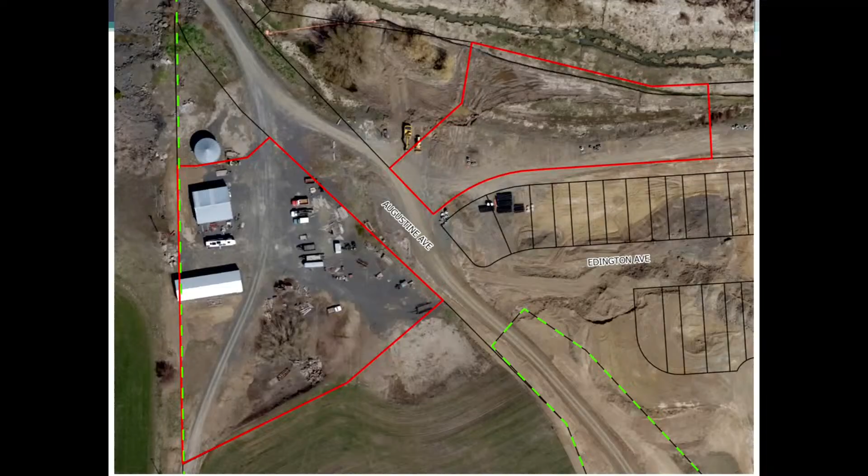So just a closer view of the current properties. There's a couple of outbuildings currently on the westerly parcel over here.

So the applicant, Impact Investors, is proposing the preliminary subdivision plat and the PUD of 4 parcels located at 2300 Augustine Avenue. The plat is 4.06 acres. The proposal is to create 10 parcels ranging from 5,500 square feet to 7,407 square feet in size, and 2 large common area tracts, referred to as the Augustine Avenue Apartments Addition. The PUD contains a mixed-use development with 10 buildings comprised of 114 dwelling units and 16 commercial live-work units, as well as an existing commercial shop that they're planning on retaining on the property.

Looking at the comp plan designation, it's urban residential - actually high-density residential, excuse me. Auto-urban residential is the yellow shade that surrounds the property, located within Edington First Addition as well. You've got parks and open space for the city park property here to the east.

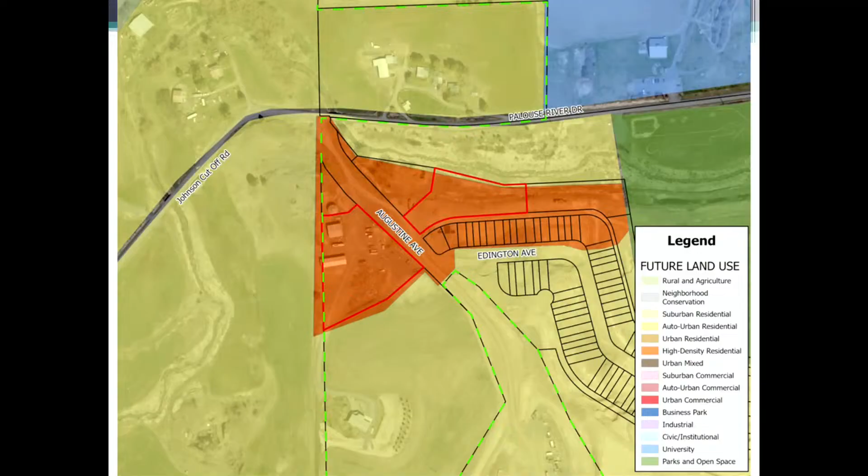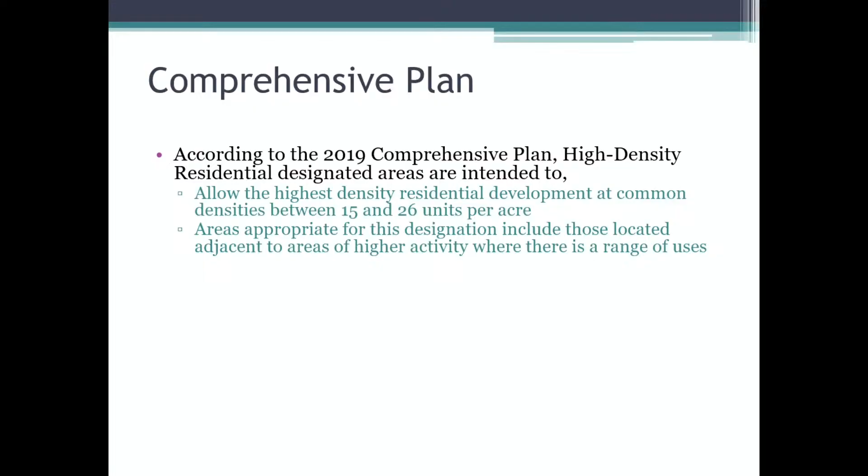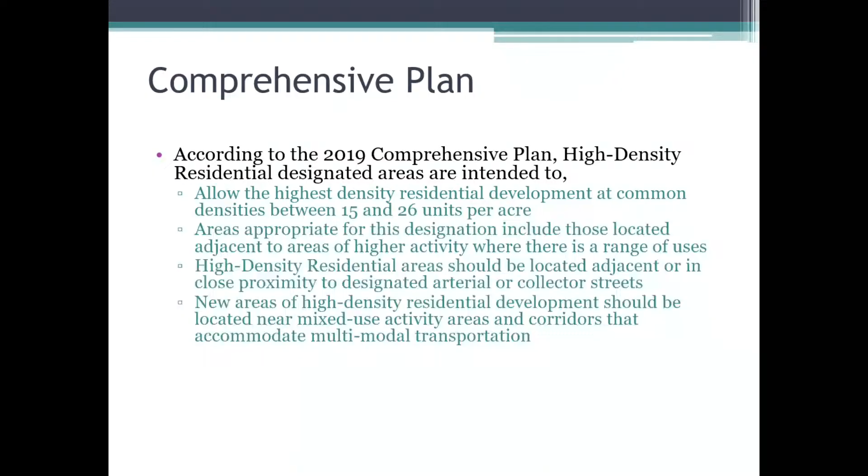High density residential in the comp plan allows the highest density residential development, at common densities between 15 and 26 units per acre. Appropriate areas for the designation include those located adjacent to areas of higher activity where there's a range of uses. It should be located adjacent or in close proximity to designated arterial or collector streets. New areas should be located near mixed-use activity areas and corridors that accommodate multimodal transportation. It points to the R3, R4, RO zoning districts as the appropriate designations.

This brings us to the zoning configuration of the area. Residential office is the subject property, as well as the properties in Edington First Addition here across Augustine, and then it transitions to the R3 designation within Edington First Addition, as well as property that was platted for Edington Estates but never proceeded to the final plat stage. So that's null and void for that subdivision plat over there, but the property is still R3.

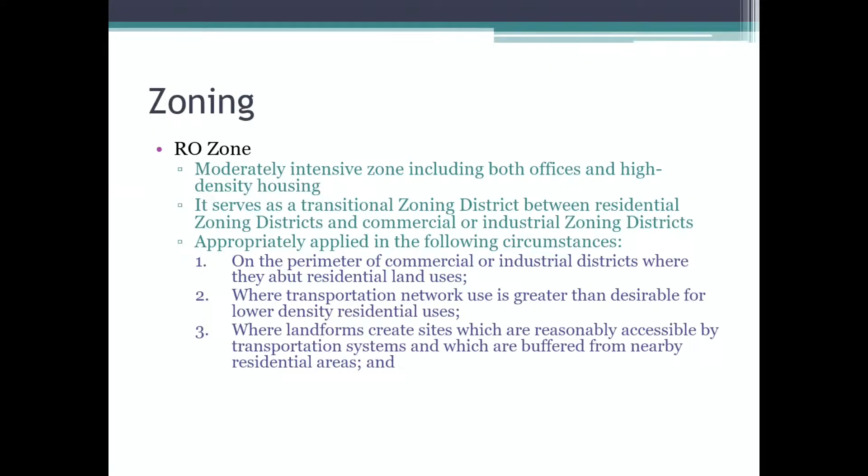So the RO zone, moderate intensity, includes both offices and high-density housing, and serves as a transitional zoning district between residential zoning districts and commercial or industrial zoning districts. It's appropriately applied on the perimeter of commercial or industrial districts where they abut residential land uses, where the transportation network use is greater than desirable for lower density residential uses, and where landforms create sites reasonably accessible by transportation systems and buffered from nearby residential areas, and where development patterns allow moderate intensity development without producing adverse visual impact or harm to the transportation network.

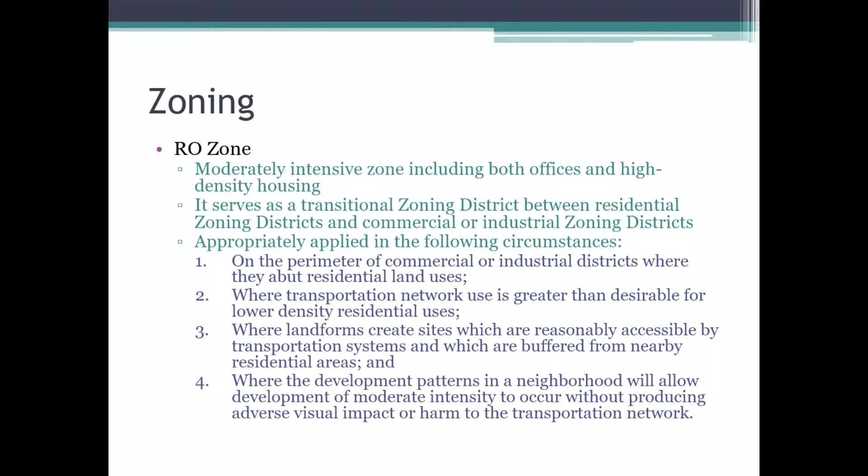So really a wide range of residential uses are permitted within the RO zone, anywhere between single family all the way to multifamily, twin homes, townhouses. Some commercial uses are also permitted, limited commercial services like veterinary services, professional offices, restaurants up to 1,500 square feet in size, group and small childcare facilities, community neighborhood centers, healthcare services, public parks, rec facilities, telecom services, personal care services,

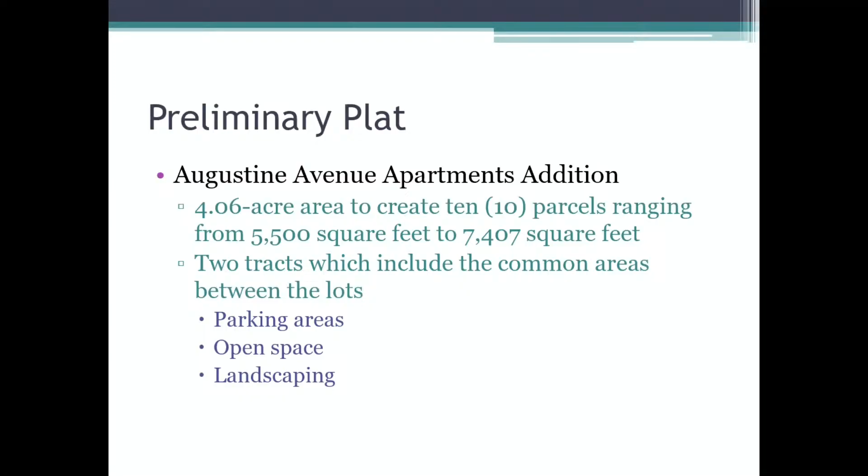and bed and breakfasts. This brings us to the preliminary plat of Augustine Avenue Apartments Addition. So we've gone over 10 parcels here, and then 2 tracts, which are the common areas. We'll get to this, but they include parking areas, open space, landscaping, as well as stormwater detention within those common tracts.

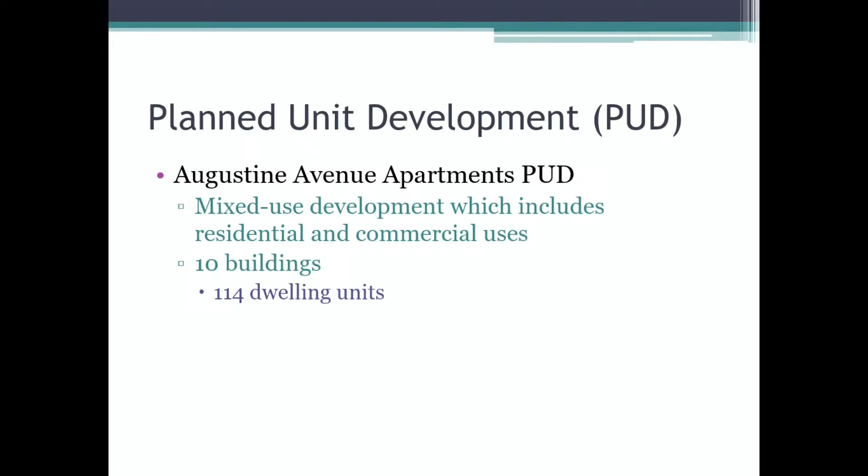So it's a mixed-use development, including residential and commercial uses. There are 10 buildings, 114 dwelling units, 17 of those are commercial spaces, and 1 existing commercial shop building.

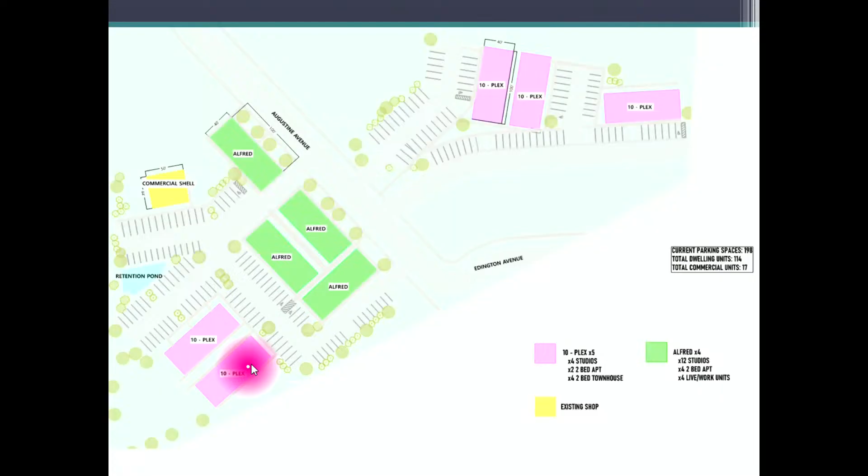This gives you a little bit more detail as far as the types of buildings. So you have a 10-plex, that's the purple rectangles, and then the Alfred buildings, which are the green rectangles, and the existing commercial space is the yellow. You can see the Alfreds are grouped closer to the street - those are the buildings that contain some commercial on the ground floor up against Augustine Avenue street frontage. Then you transition to the 10-plexes, which are completely residential in those locations.

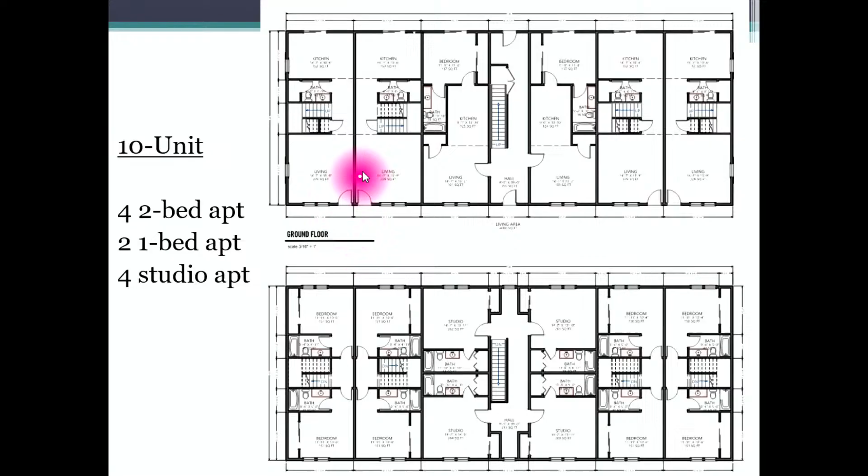So these are the stairs - these are up-down, more of a townhouse configuration. You'd enter from the exterior, have the living space and the kitchen space, and then go up the stairs for the 2 bedrooms. So that'd be more of a townhouse style configuration as opposed to multifamily.

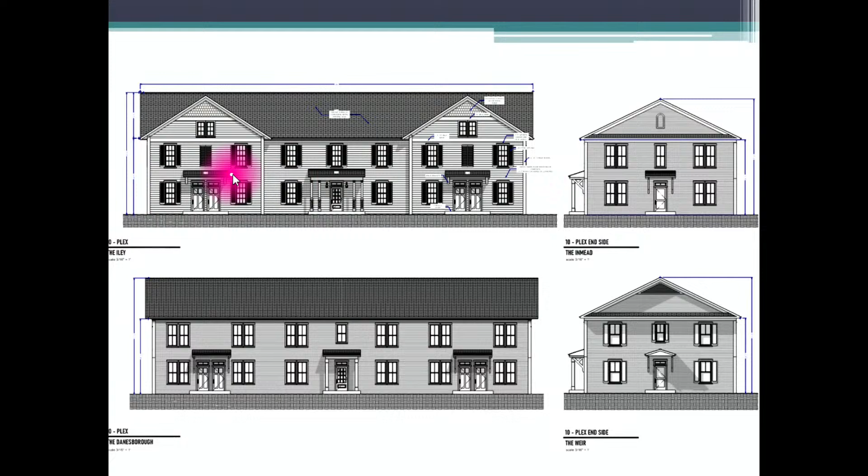This brings us to the exterior elevations. The applicant is proposing a few different facade articulations, essentially different options for the facades for the 2 proposed buildings. You can see at the top a bit more articulation to it, gabled roofs, and then the second option there. There's a third option and a fourth option as well.

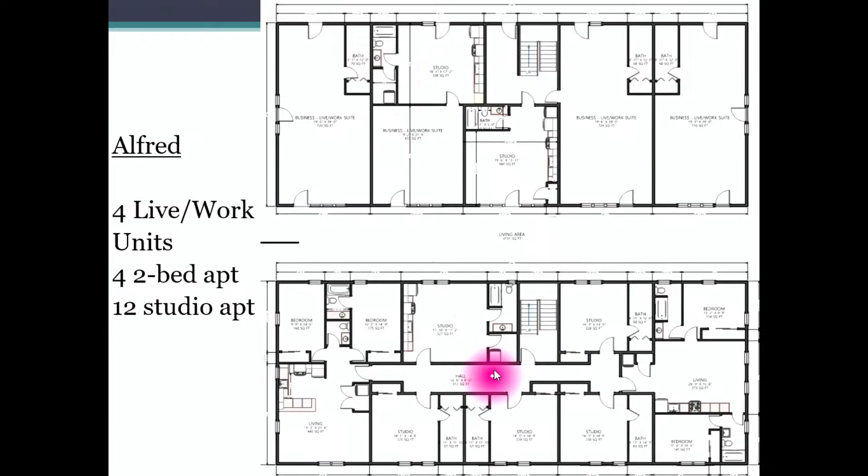It brings you up to the second and third floors, which have the same building footprint, so really just a mixture of 2 bedrooms. There's 4 2-bedroom apartments and 12 studio apartments contained within the Alfred.

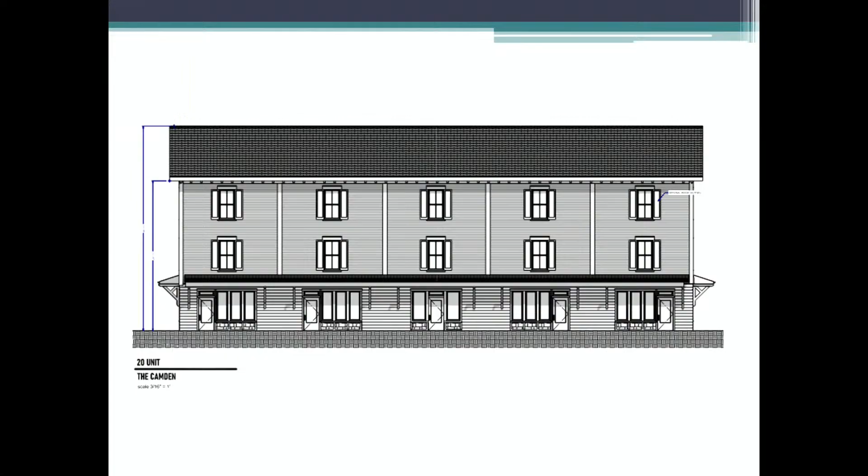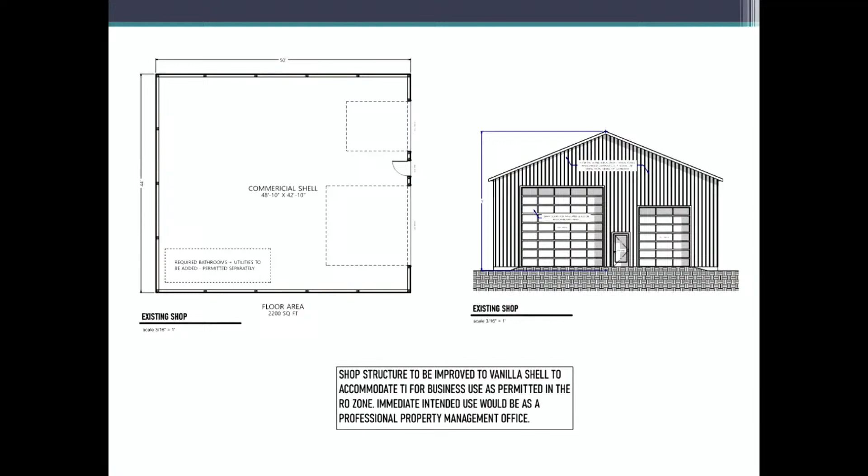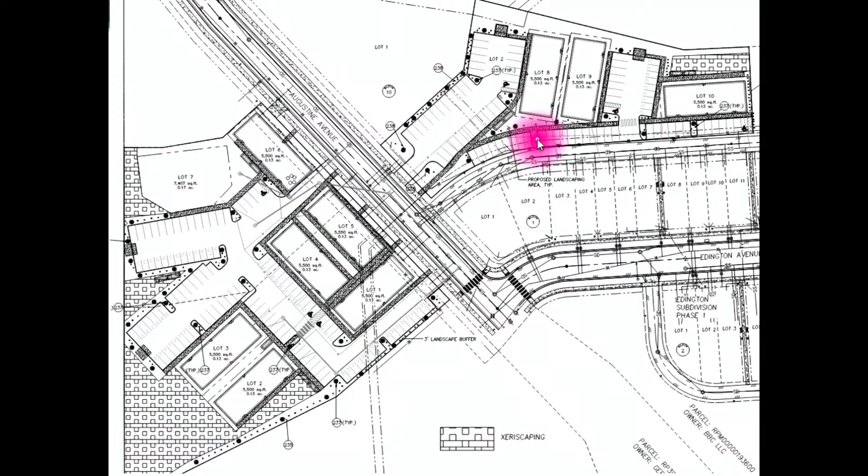So this brings us to the landscape plan that's been submitted. Typically landscaping around the parking areas, so it's a 3-foot buffer, tree every 40 feet, shrub every 6 feet. And then they've indicated there's a substantial area intended for xeriscaping, and that's the symbol for xeriscaping. So the entire kind of west side, some in between the buildings, and then some locations surrounding the property there to the east.

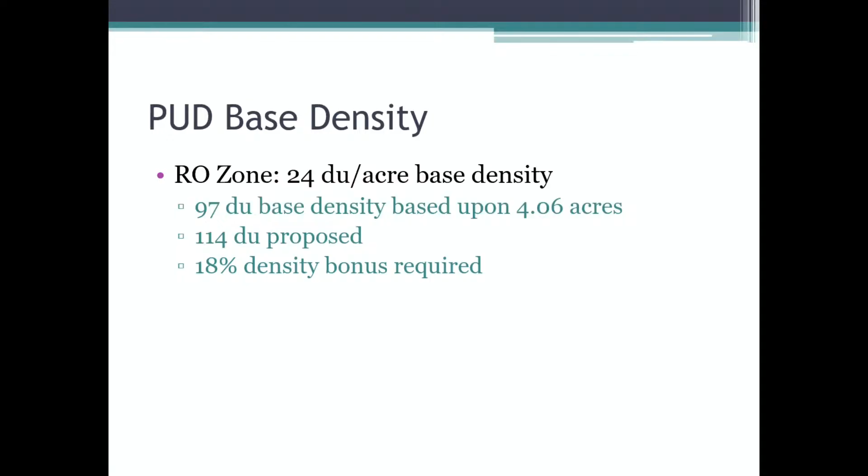Brings us to the base density requirements. So residential office, it's 24 dwelling units per acre for the base density. Based upon the 4.06 acres of the property, that equates to 97 dwelling units base density. 114 dwelling units are proposed, which results in the need for an 18% density bonus that would need to be required.

So looking at the density bonus the applicant has proposed, the first one is a mix of housing types and uses. You can get a 10% maximum bonus for this. It really states that any combination of single-family, duplex, multifamily residences, and or commercial, institutional, or civic uses may qualify. The applicants included a range of various sizes and configurations of the multifamily dwellings, and also incorporated commercial spaces on the ground floor facing Augustine Avenue street frontage. So it's staff's recommendation that a 5% density bonus should be awarded for this category.

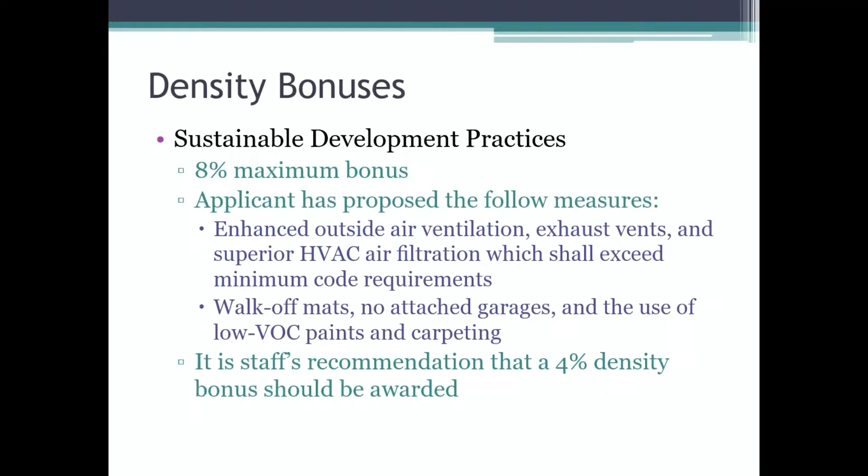Next one is sustainable development practices, 8% maximum bonus for this category. Applicants propose the following measures: enhanced outside air ventilation, exhaust vents, and superior HVAC air filtration, which shall exceed minimum code requirements, walk-off mats, no attached garages, and the use of low VOC paint and carpeting. And with those, it's staff's recommendation that a 4% bonus should be awarded in that category.

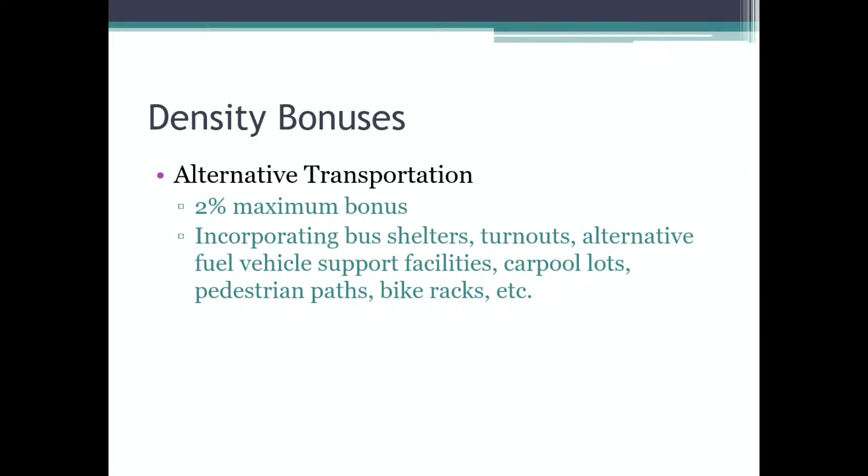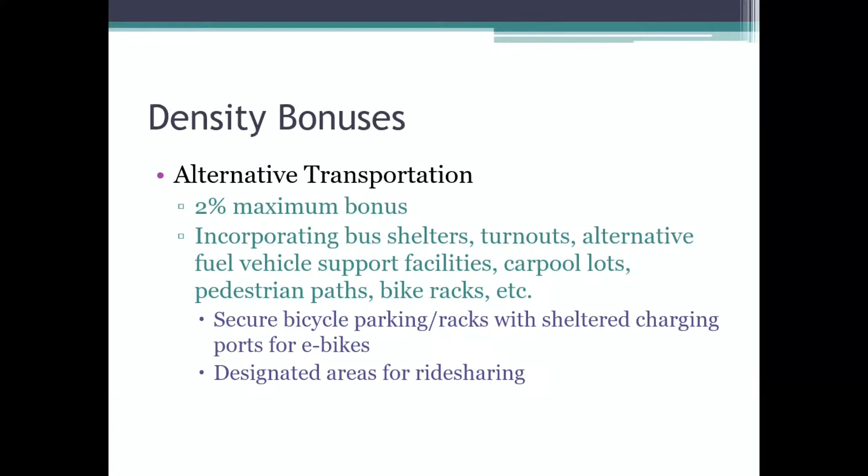Alternative transportation, 2% maximum bonus, incorporating bus shelters, turnouts, alternative fuel vehicle support facilities, carpool lots, pedestrian paths, bike racks, etc. could achieve the maximum 2% density bonus. Applicants propose secure bicycle parking racks with sheltered charging ports for e-bikes, designated areas for ride sharing as well. About half of the bicycle parking appears to be covered with standalone structures, some inside the buildings. Staff's recommendation that a 1% bonus should be awarded for this proposal.

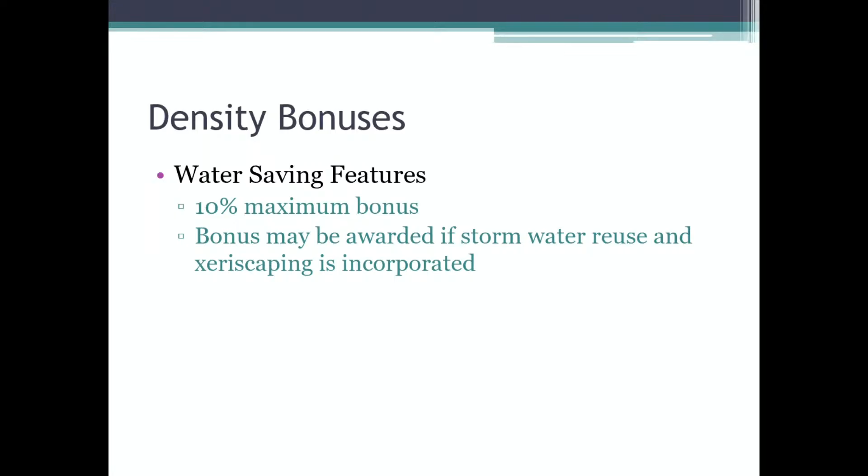Water saving features is the next category. There's a 10% maximum bonus that could be awarded. Bonuses may be awarded if stormwater reuse and xeriscaping is incorporated. The applicant is including xeriscaping with native and drought tolerant plants, high efficiency irrigation systems, and potentially a stormwater reuse system for landscaping. Staff's recommendation that a 5% bonus should be awarded in this category.

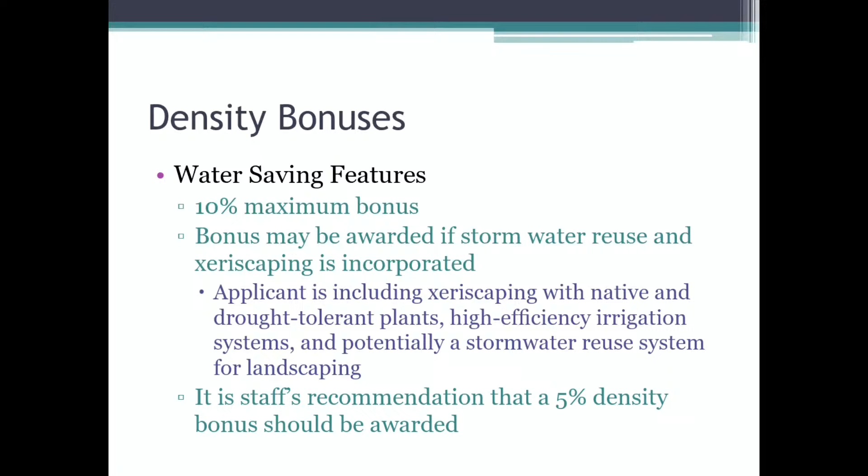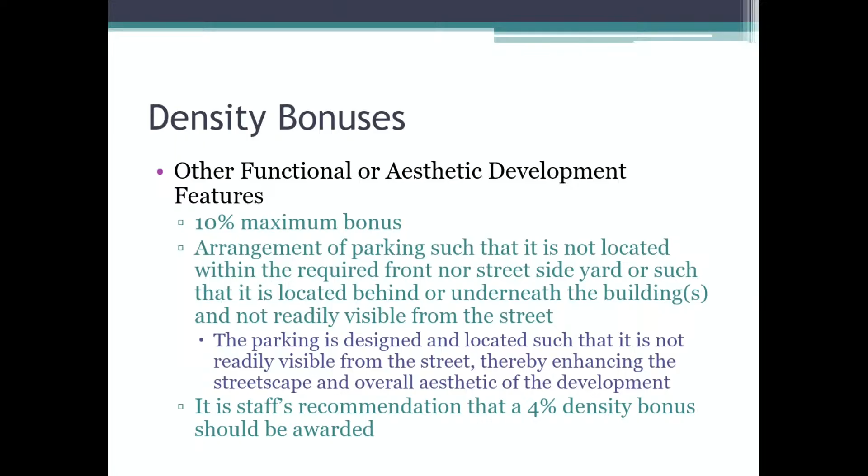And then the last one, I believe, other functional or aesthetic development features could be 10% maximum. The arrangement of parking such that it is not located within the required front nor street side yard, or such that it is located behind or underneath the buildings and not readily visible from the street. So the parking in this proposal is designed to be located typically behind those buildings, at least on the west side, so it's not readily visible from the street, which would enhance the streetscape and overall aesthetic of the development. Although the development on the east side has the parking lot in front. So with that, staff's recommendation would be that just a 4% density bonus should be awarded in that category.

Looking at our total of all the categories brings us up to 19% for recommended bonus density. Only 18% was needed to be achieved, so that would exceed that requirement.

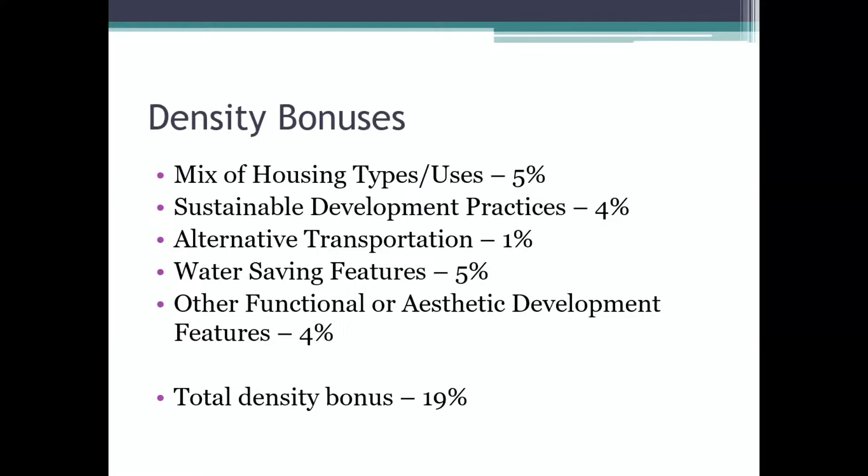Brings us to the street network. Augustine Avenue is a collector, so there's sidewalks, curbing, and bike lanes on both sides of the street with no on-street parking. The off-street parking for this proposed development requires 192 spaces; 198 are provided, including 6 ADA accessible spaces, and 88 bike parking spaces are provided.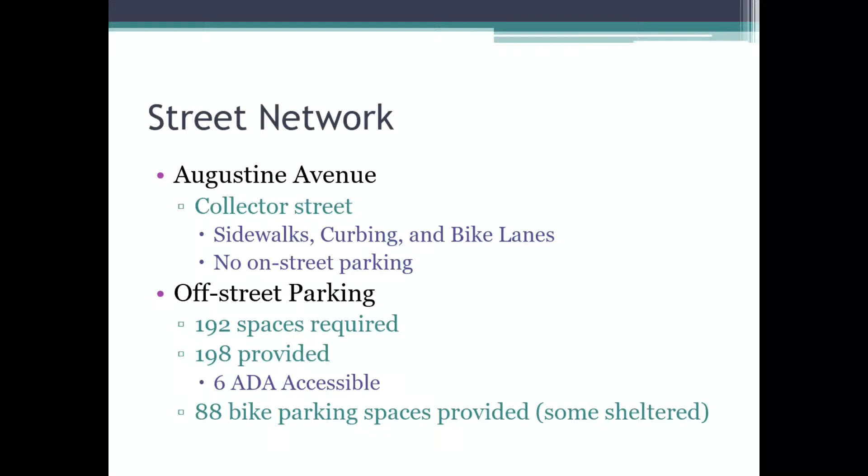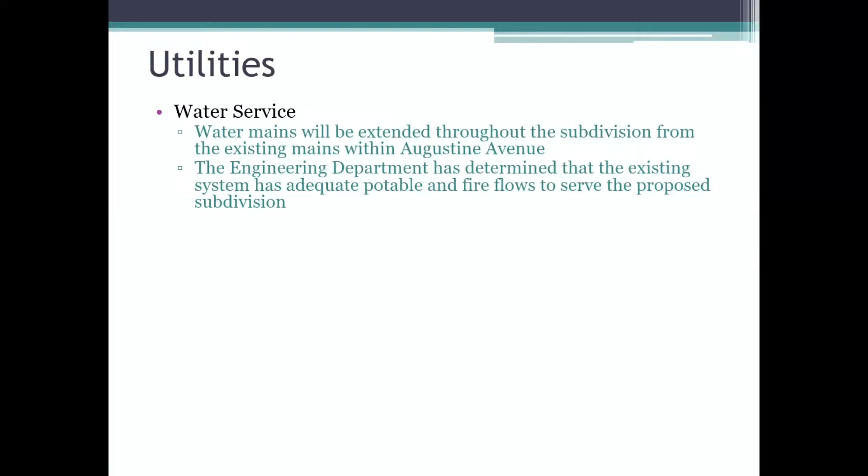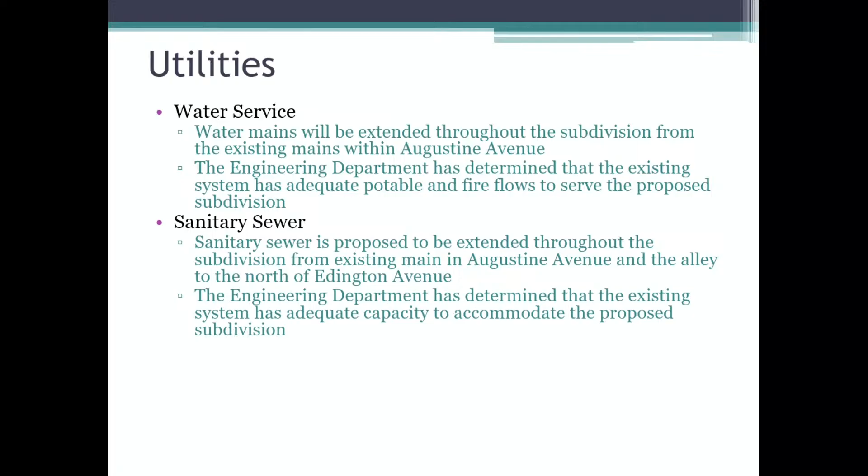Water mains are going to be extended, since they're already in Augustine Avenue, and will just be looped through the development. Engineering's determined that the existing system has adequate potable fire flows to serve the proposed subdivision. Same with sanitary, which is proposed to be extended from Augustine Avenue as well as the alley to the north of Edington Avenue. Engineering determined the existing system has adequate capacity to accommodate the proposed subdivision.

Storm sewer will need to be piped and directed to the stormwater detention pond located on the western portion of the development. And of course, we'll need to meet stormwater detention requirements, which require the stormwater to be detained at the pre-development rate.

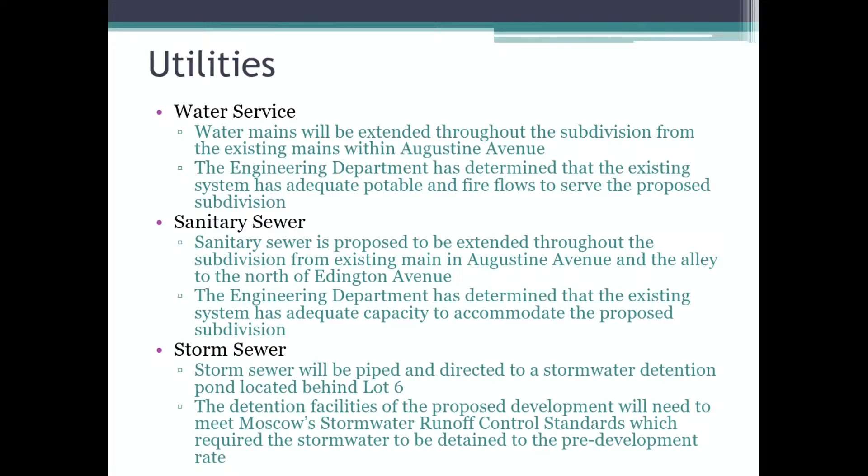So the property on the east side of Augustine is already in Edington First Addition, so that's already been deferred. It's just the property on the west that would need to add an additional subdivision parkland dedication requirement to be deferred.

So that's our Parks and Facilities Manager's recommendation, to defer the parkland to a future phase of Edington Addition to the east and southeast. And the Parks and Rec Commission is going to consider the request at their upcoming meeting on July 24th.

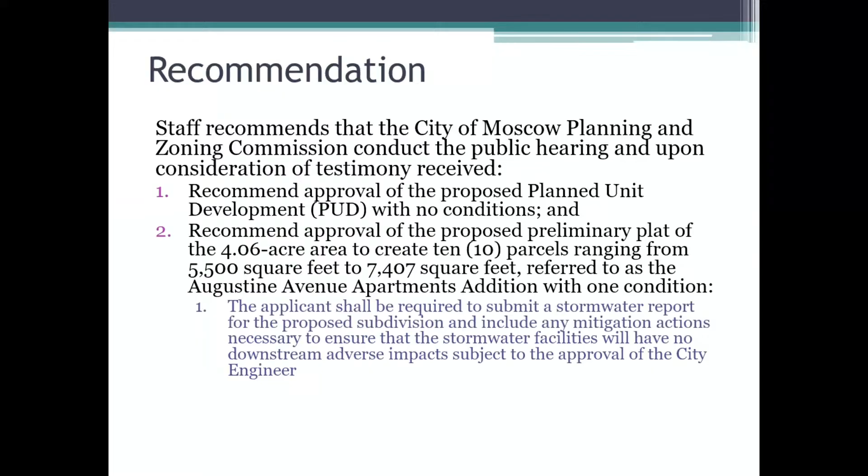So with that, staff recommends the commission conduct the public hearing, and upon consideration of testimony received, recommend approval of the proposed PUD with no conditions, and then recommend approval of the proposed preliminary plat with one condition: that the applicant be required to submit a stormwater report for the proposed subdivision and include any mitigation actions necessary to ensure that the stormwater facilities will have no downstream adverse impacts, subject to the approval of the city engineer. And of course, in accordance with the commission's decision on the PUD and plat, direct staff to prepare the RCS documents. I'd certainly try to answer any questions you had.

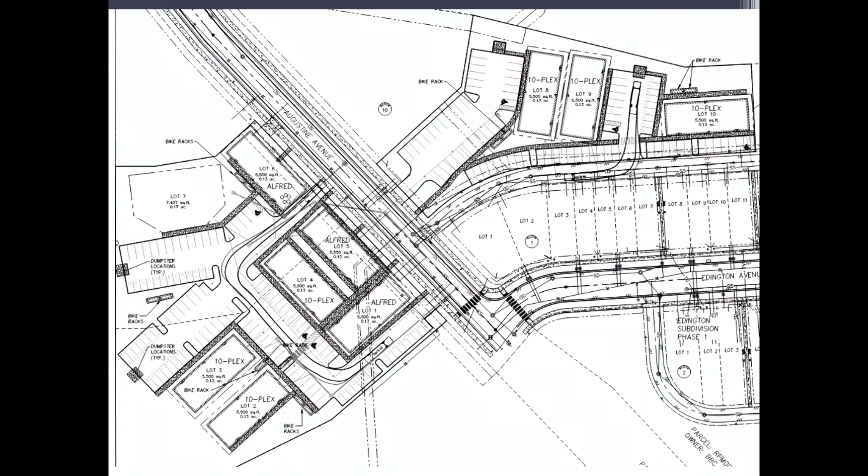You could certainly ask the applicant that. I wouldn't be maintaining the snow on the property.

Anything else? Joel, go ahead. I have a question about the design of the Alfred buildings.

I assume that for the building inspector to actually approve plans and so on is something that would happen in the future rather than at this point. But my question with the Alfreds is when I start counting the number of potential bedrooms on the second and third floor, I get 8 bedrooms on each floor. I count up stairways. Studios. There's 1 in the Alfred design.

Oh, a stairway to go to the second floor? To go from the first floor to the second and third. If you look at the 2-bedroom ones that have up and down, they have interior stairs - those are the 10-plex units. The Alfred units have one single stairway to, by my count, accommodate 16 bedrooms.

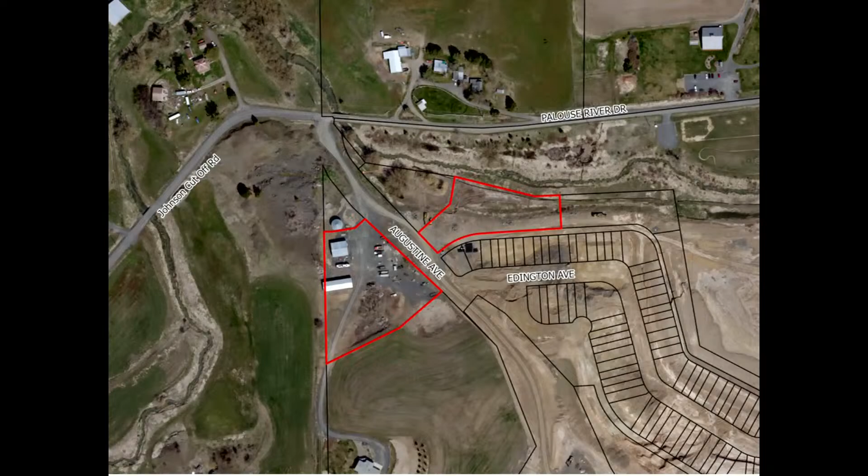But to speak to the density, this is just for the PUD. So the density that's allowed underneath the zone, I have it in my staff report. I think it's 221 units. They're proposing 114 here. So that would be the density that would be permitted if you could get enough parking on the site.

So if they built it, what is allowed without a PUD? You're saying that's a higher number? Correct. And the parking for that would be where, on the original plan? It would depend upon the configuration of the unit—whether it's a studio apartment, a 1-bedroom, or a 2-bedroom. It changes depending upon that.

Is there another plan, an original plan? Yeah, there's an original plan before the PUD, the one that Mr. Gadwal was showing the difference. Mike, can you put up the original zoning approval? There is no original—this is what's being proposed. There was a neighborhood meeting where they had conceptual images of what they were planning, and that's changed slightly since then.

Conceptual images change. Keep in mind that these are renderings. They're not going to invest the money into landscape architects or main architects until this process goes through. I think we're kind of picking it apart, but they're renderings—they're not going to invest into the full design until we approve it.